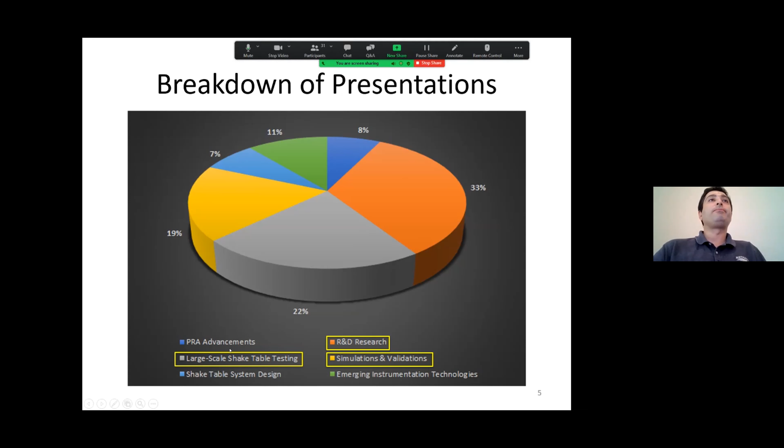As a part of developing the program, we grouped those abstracts into different tracks, and among the received abstracts, a third were focused on R&D research, 22% on larger scale testing, and about 20% on simulations and validations. We ended up having 26 presentations in total, from which 23 were from the US, 2 from Japan, and 1 from Italy. Within the US, we had a pretty diverse group of presenters, from the University of New Hampshire all the way to Buffalo and Illinois, and you see a lot of concentration on the west side, as expected. What was pleasant to see was participation from 3 major experimental facilities with the capabilities to do larger scale soil testing.

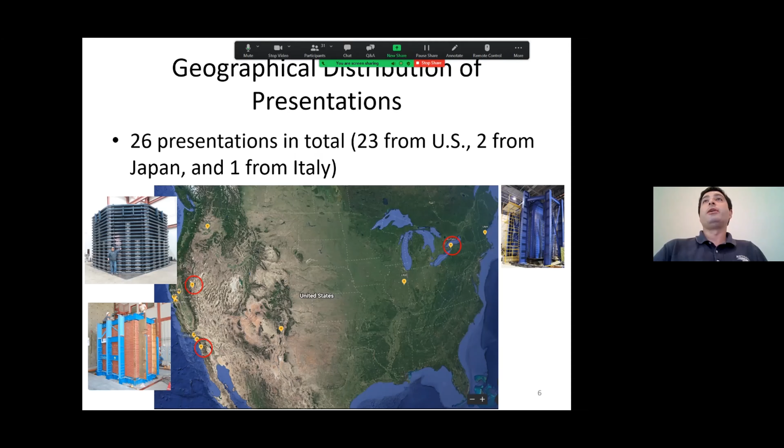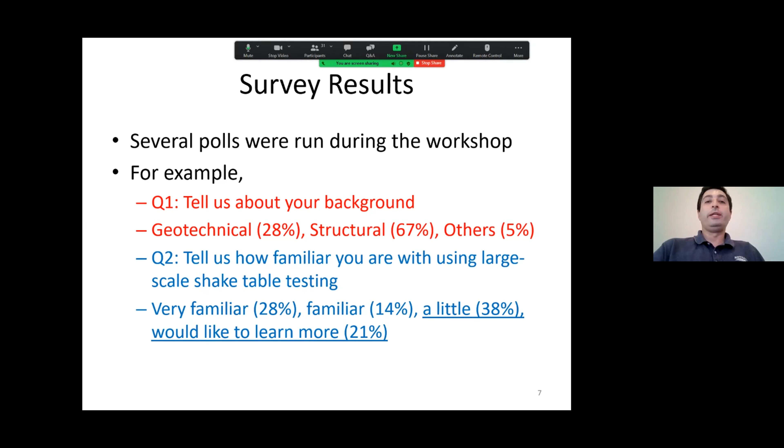Since the workshop was held virtually, we put together a virtual tour of the new larger scale facility at UNR, and I'm gonna show the video. It's a relatively quick video, 4 minutes.

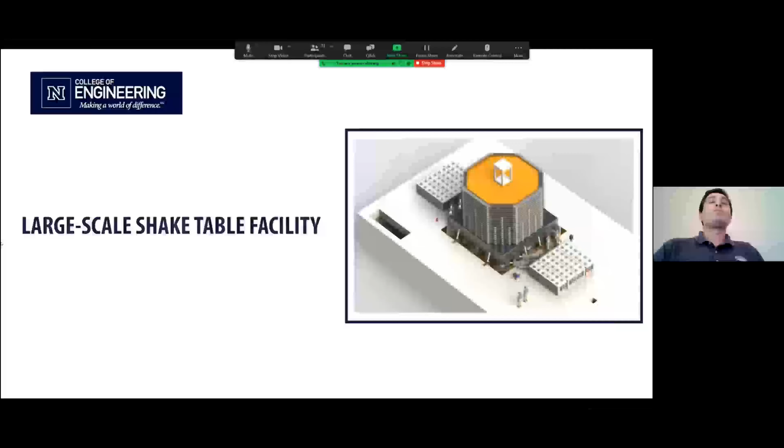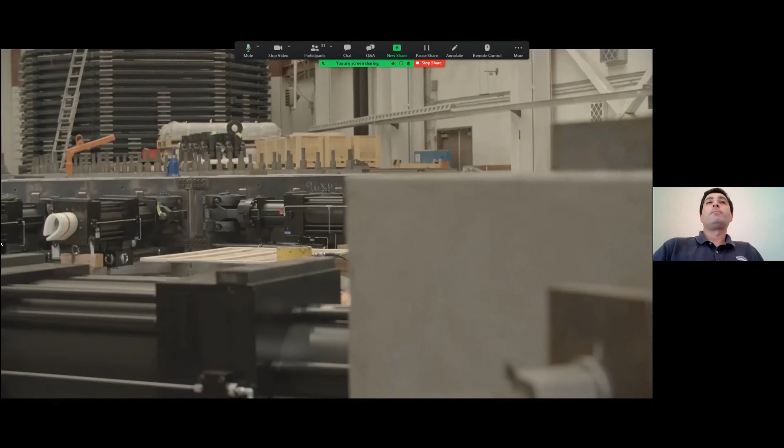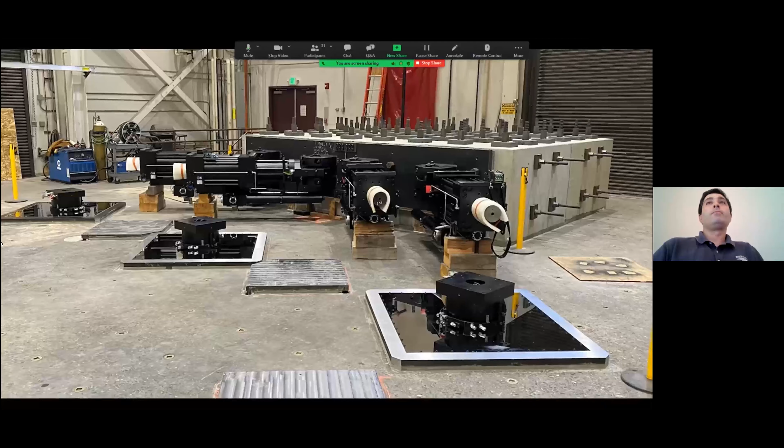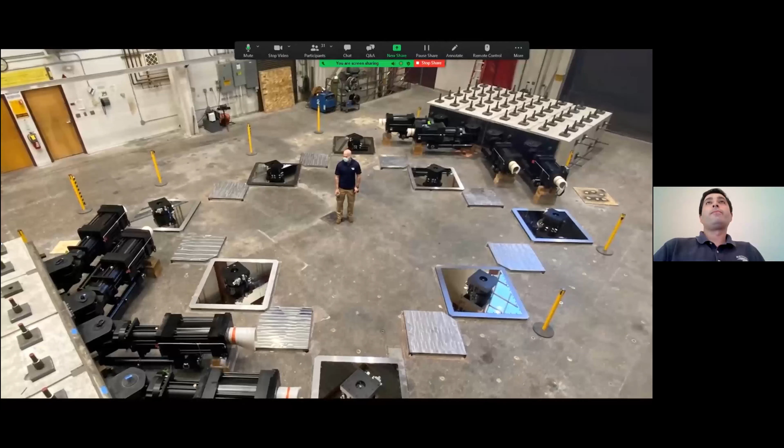Welcome to the large-scale shake table facility in the Department of Civil and Environmental Engineering in the College of Engineering at the University of Nevada, Reno. The custom-built shake table was completely designed at the University of Nevada, Reno to specifically study the response of soil-structure interaction subjected to earthquake shaking. The shake table is a biaxial table including yaw rotation, with a system of concrete buttresses, individual concrete blocks, and a compact V configuration of 8 actuators. It has 13 inches of stroke in each direction and applies 1.1 to 1.2 million pounds of force in both X and Y. The platen sits on a system of 8 hydrostatic bearings that ride on a thin film of oil that's 0.007 inch thick. This stiff film of oil maximizes capacity and is practically friction-free. The bearings are oriented on the perimeter of the shake table to maximize our ability to overcome the roll and pitch moments coming down from the box. This perimeter configuration is optimal for our platen.

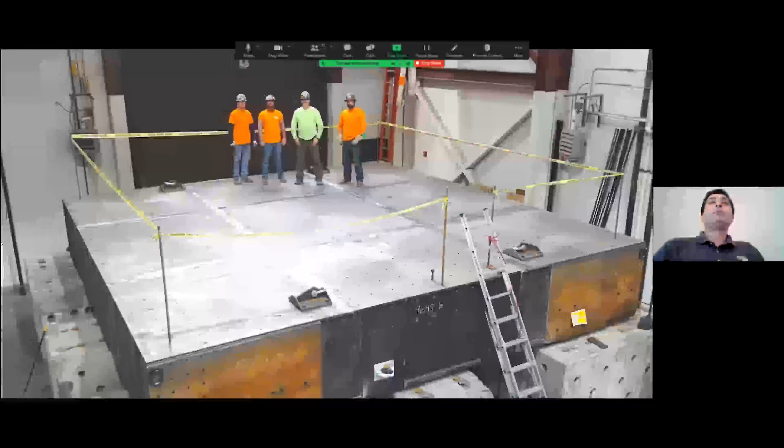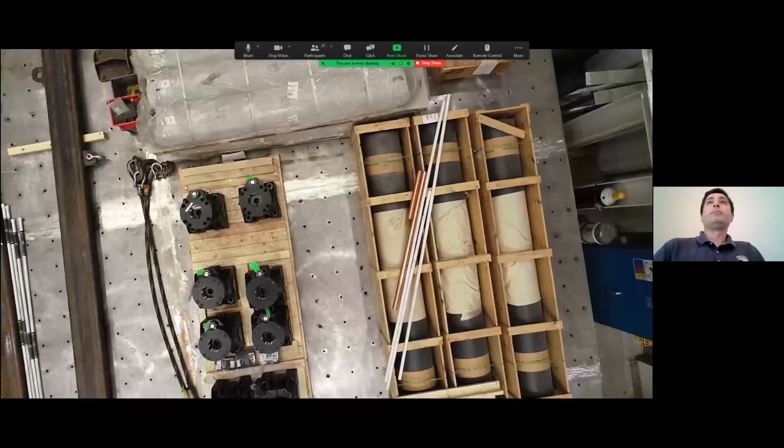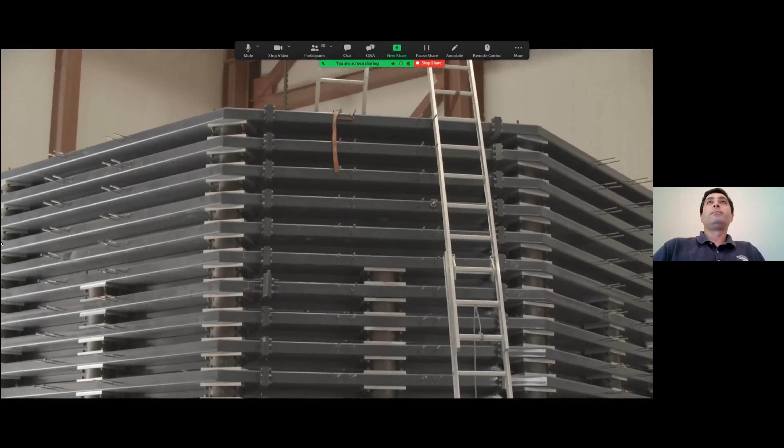The platen itself is 24 feet by 24 feet. Because of its size, it was fabricated in 9 pieces and assembled and welded over a 3 to 4 week period. Because of the power of the actuators and the tendency for platens to move at high velocity, the system requires a lot of hydraulic oil and flow. Our extensive and custom hydraulic piping distributes oil at a velocity of 40 inches a second, enough to handle most earthquake motions. The laminar soil box consists of alternating layers of rubber bearings and 19 steel frames. The octagonal box is 21 feet across, 15 feet tall, and can hold 350 tons of soil.

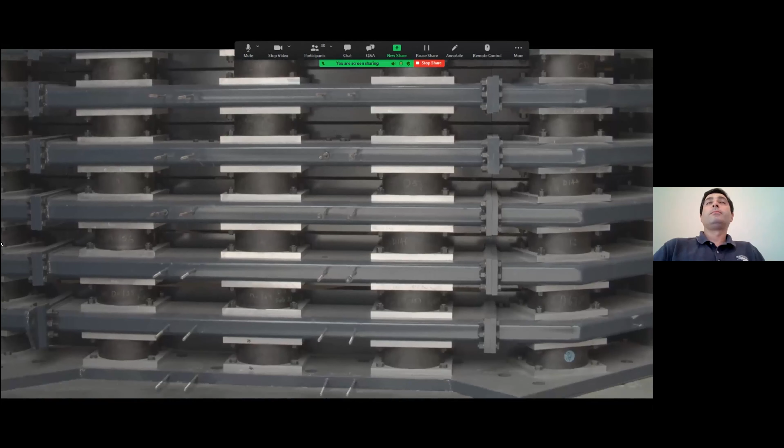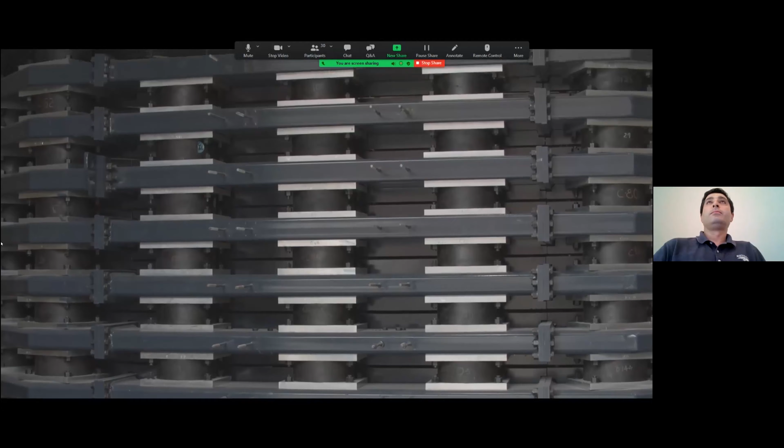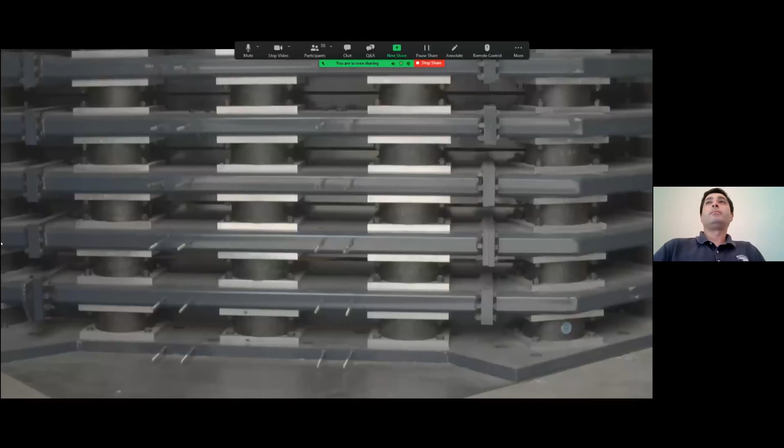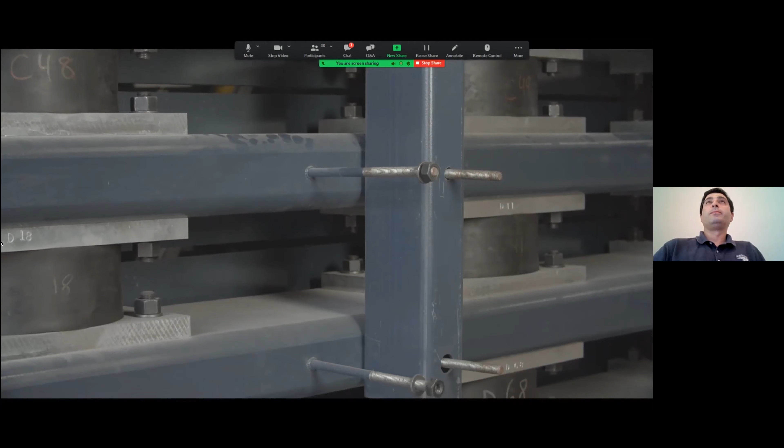A collaboration of the Department of Energy, the Lawrence Berkeley National Laboratory in Berkeley, California, and the University of California, Davis. The many applications of the large-scale shake table facility include research that is designed to enhance the seismic safety of DOE and nuclear facilities. As such, it supports the goal of the Department of Energy to develop natural hazard resiliency of DOE mission-critical facilities and secure public safety, and represents another avenue for researchers to pursue multi-agency research that raises the bar for the field.

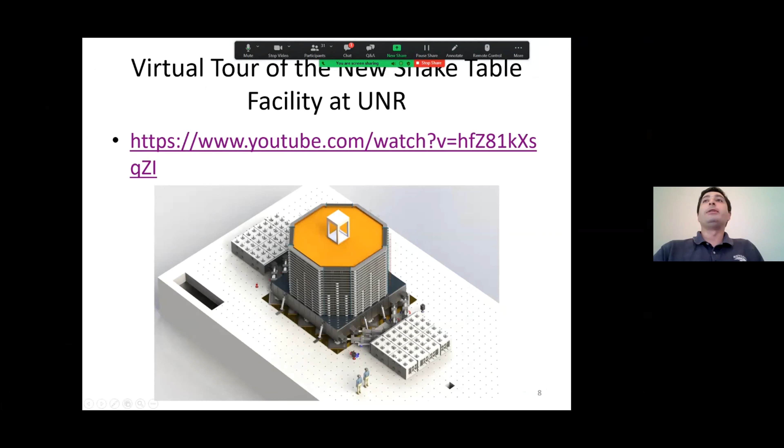Just for the sake of time, I'm going to skip the full acknowledgement. All the presentation slides have already been uploaded on the PEER website. If you go on the PEER website under news and events, you see a link to the DOE PEER workshop. And then once you go there, under the program, you see that all the presentation slides are available, and even a link to this virtual lab visit is available on the website. As a part of the project, we will be putting together a report which will be published through PEER. The report will include the abstracts, the slides, as well as key findings and all the discussions that we had during the workshop, and that is the plan.